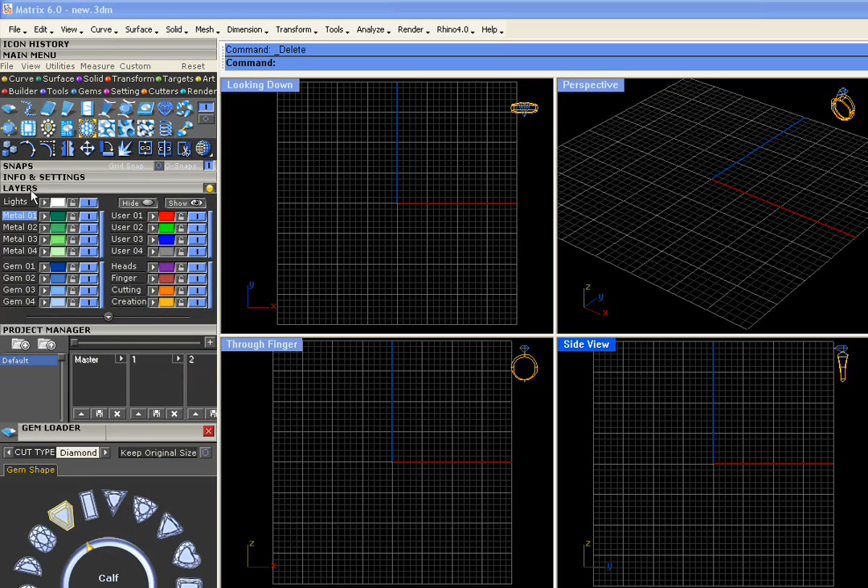The first thing we want to do is go lay out the gems that we need, so we'll go to Gem Loader. We're going to first choose the different stones we're going to use. I'm going to use Princess Cut, and I want to get about a 2-carat stone here, a 6.5 millimeter square Princess Cut.

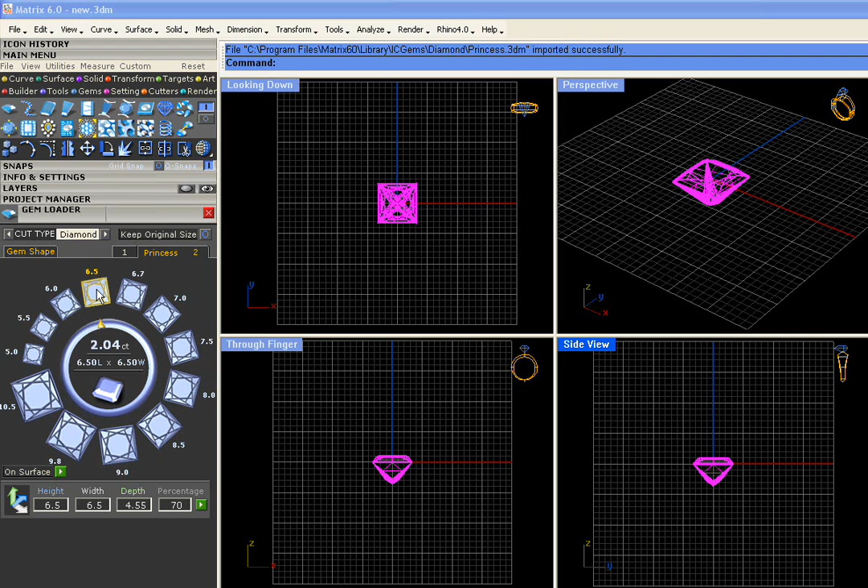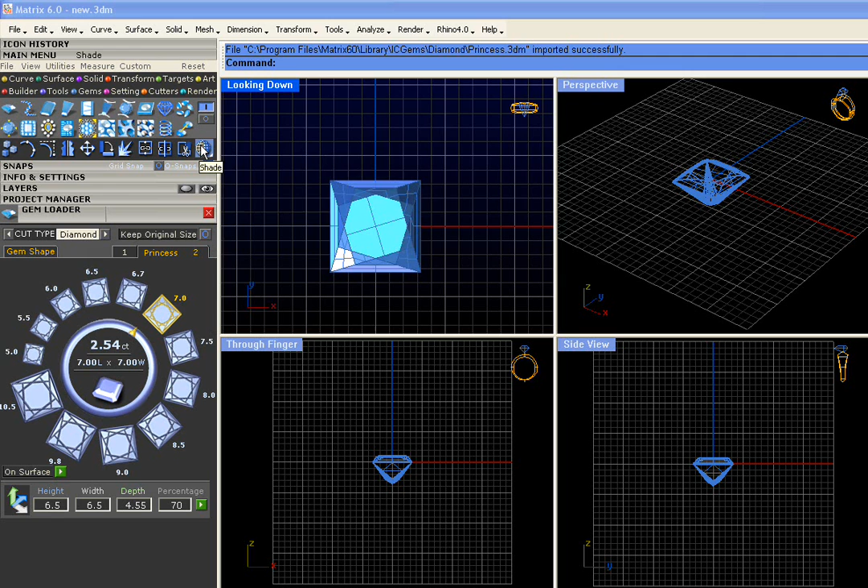There's our stone out there. If we go to the shade globe and click on the little quick tip arrow, we have our different shade modes. You can see as I scroll through, there are lots of different looks. One of my favorites to work in is called the working shade at the very top. I'll click on that one, come back to the shade globe, toggle that off, and then right click to toggle all those on.

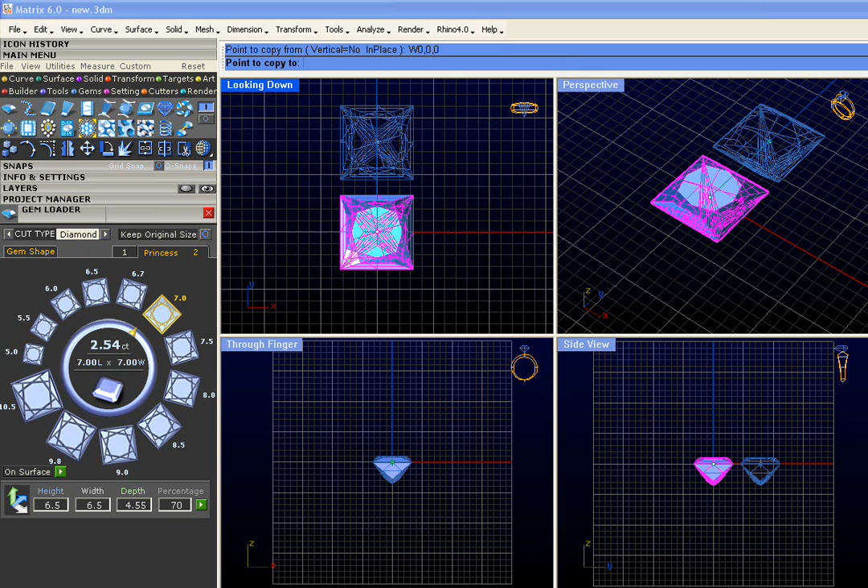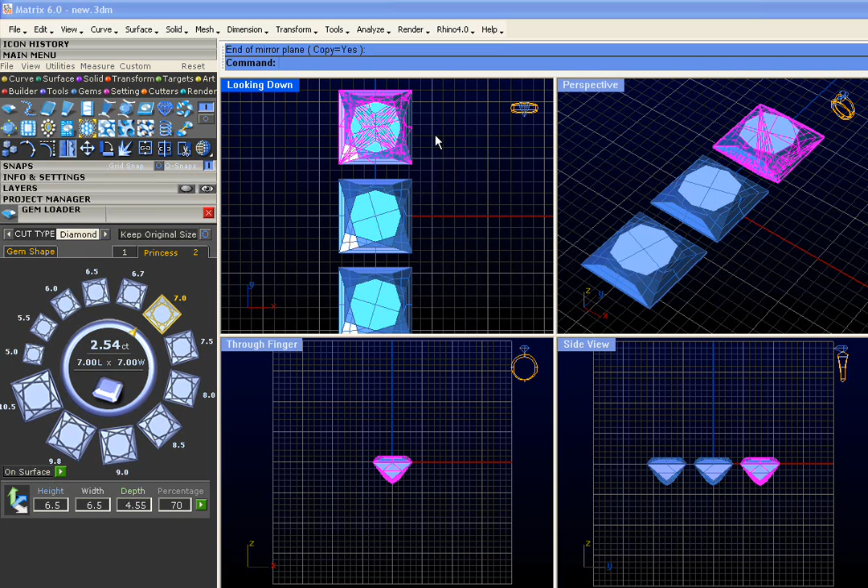So I'm going to go make a bezel for just one of these. Doesn't matter which one, so I'll select it, hit F6, and go to Build Bezel.

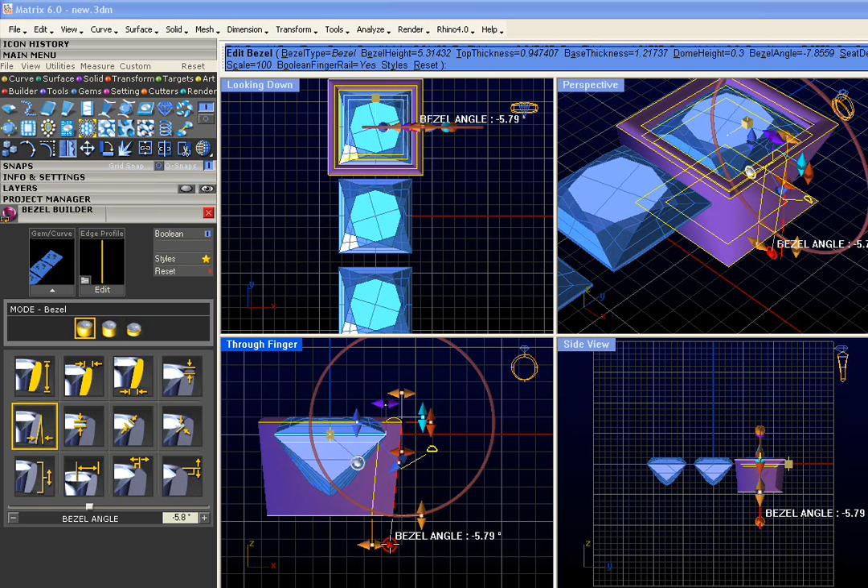It's going to start showing me a preview for this. We've got our different things to choose from. I'm going to take the seat depth down a little bit. And I actually want to take the bezel angle itself and take that out so it's straight walls all the way down, so I can hold down Shift to ratchet that right to 0. So I'll press enter.

I'm going to copy this, but instead of using duplicate to copy the bezel to these other gems, I'm going to select the items that I want to have that bezel on, hit F6, and go to Match Attributes.

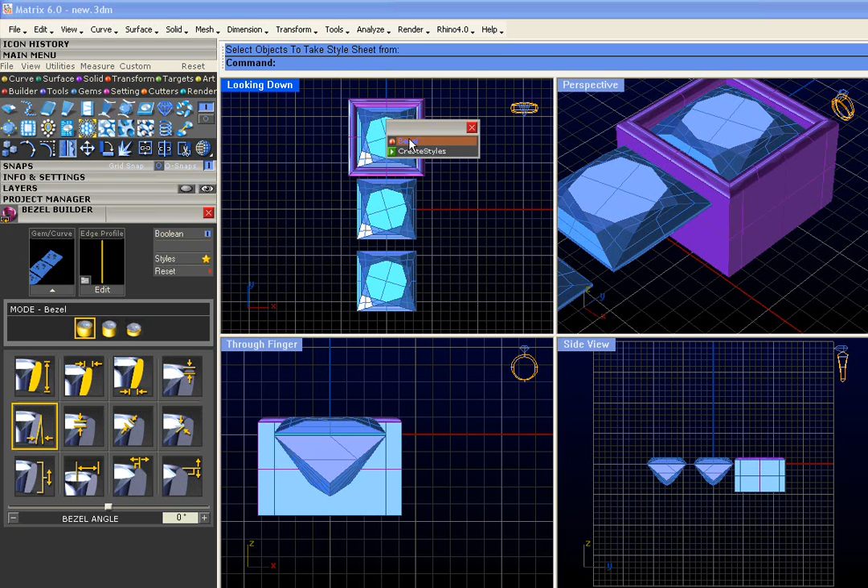It asks me in the command line now, select the objects to take style sheet from. It wants to know what object you're trying to take the information from. That would be this gem with the bezel on it, so I'll click on the gem, and it says, here's the information attached to that gem. It's the bezel and the style sheets associated with that bezel, so we want to click on both. First I'll click on bezel, then create styles, and it's going to copy that information to the other gems that I had selected.

So let's take all that, throw that into a job bag.

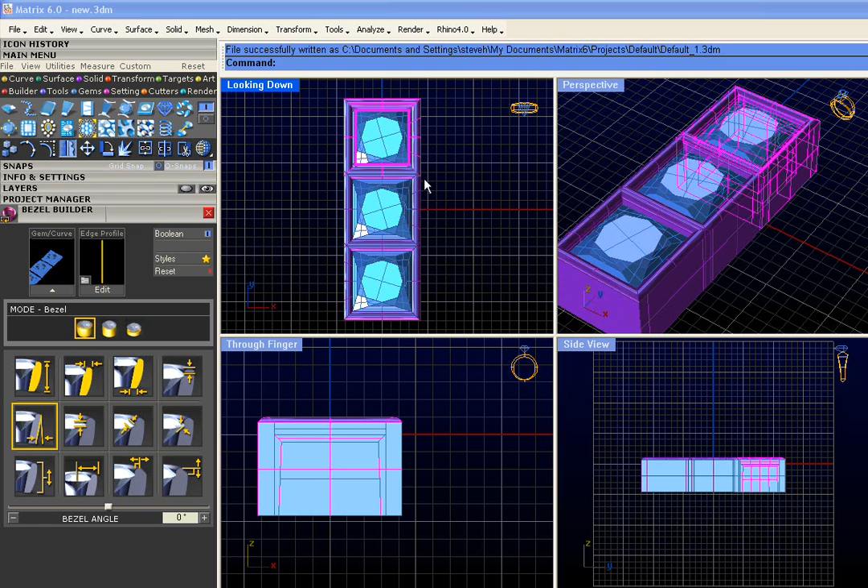Then let's make a variation of this. We'll do a different 3-stone pendant here. First thing I want to do is just delete the bezels off of here, and then I want to swap out the top stone and the bottom stone for a different cut.

So I'm going to select one of those and go back to Gem Loader, and I want to go to Gem Shape and choose a different shape. But before I select anything, I want to turn on the Keep Original Size. If I want the new stone shape to be the same size as this original princess cut, I'll click on this to turn it on.

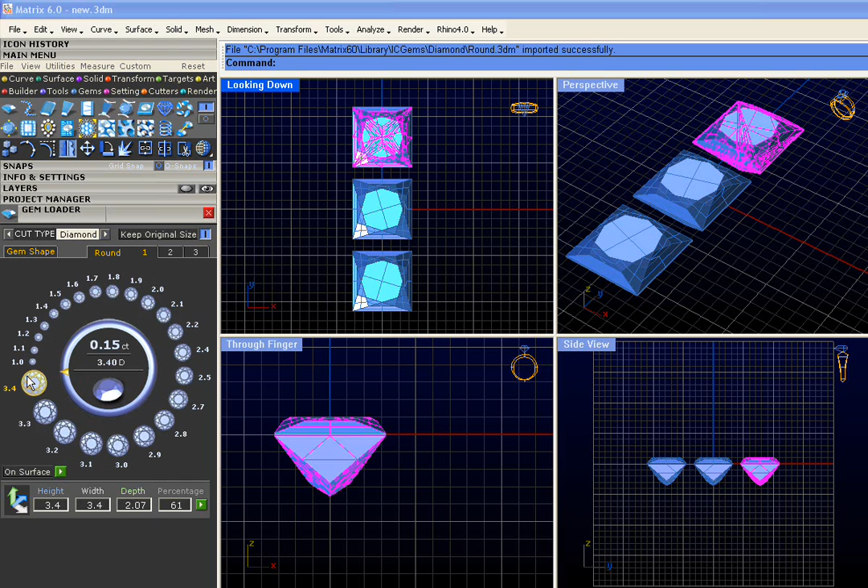Then I'll go choose the shape that I want. Now that I'm in the sizes for that shape, I can click on any of these because I have the Keep Original Size turned on. It's not going to matter which size I choose, it'll swap it out for me.

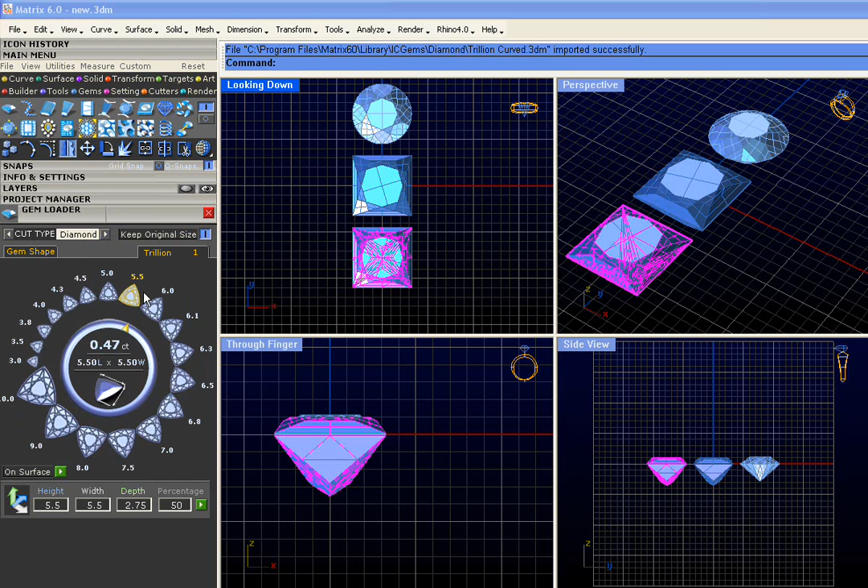I'm going to deselect that. I'm going to select the bottom one, and we'll go over to our gem shape, and I want a trillion for this one. Here again, just select one of the sizes, and it swaps it out for me.

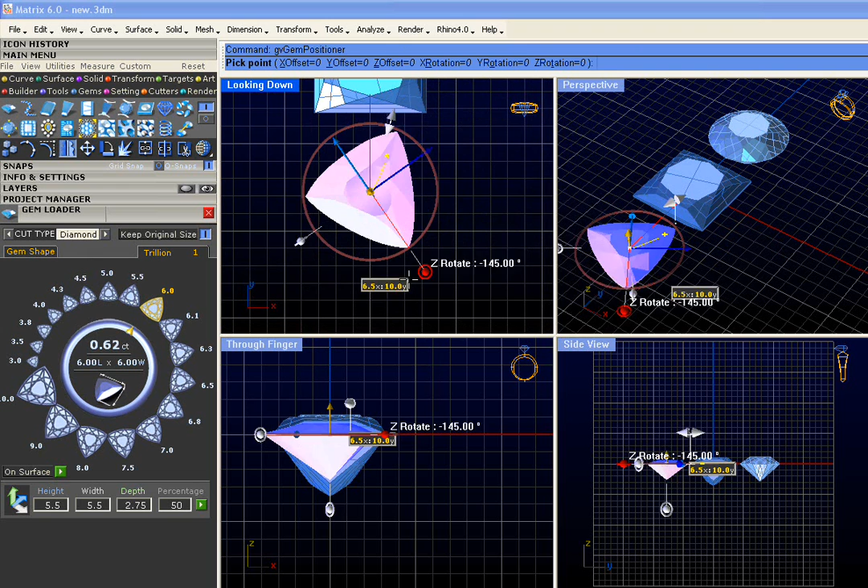Now, this is not the orientation I want for this, so I want to do an F6, MSR, and if I hold down Shift and grab the Z rotate handle, I can ratchet that all the way around to 180 and let go and press Enter, and it's in the correct orientation now.

It's always a good idea to job bag everything as you go. So when you get the stones out there that you want, go ahead, throw those into a job bag.

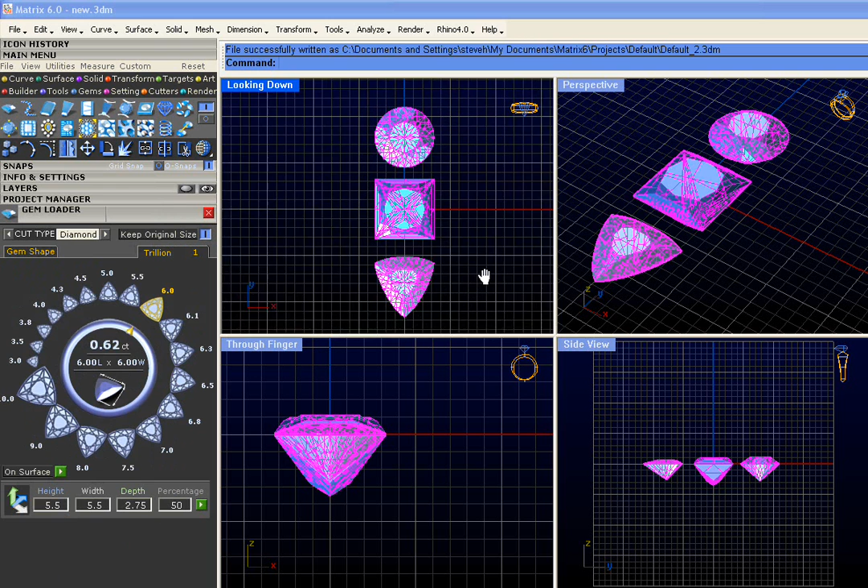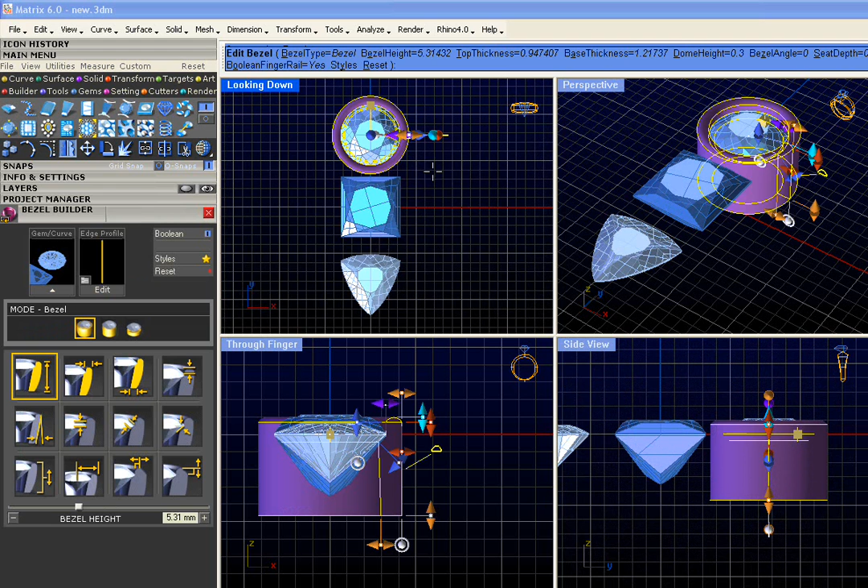So let's create a bezel for one of these stones. There it is. If we wanted to make any changes to this, we certainly could, but I'm just going to accept it as it is. Press Enter, and I want the same bezel to be on these stones.

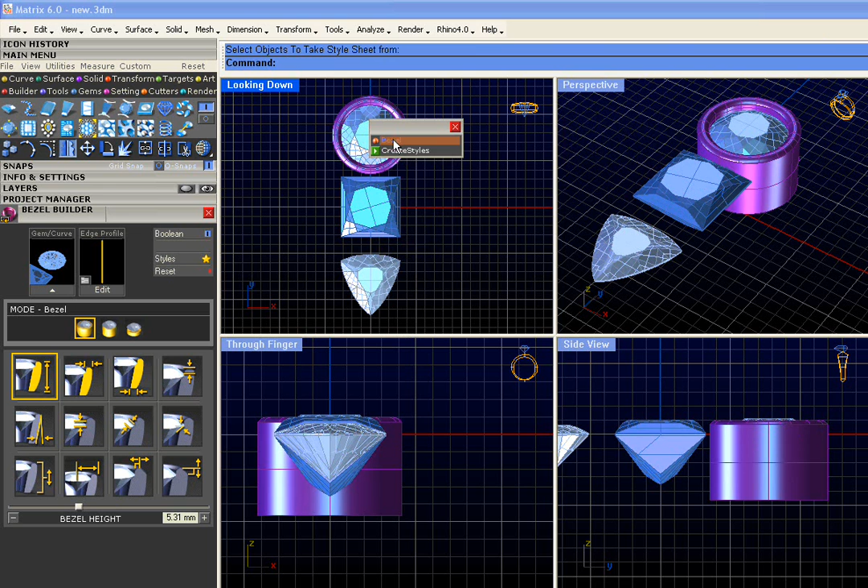So I'm going to select those, hit F6. We want to match attributes. We're going to take the information off of the bezel. We want the bezel and the create styles, and it's going to copy that same information over and apply it to different shaped stones.

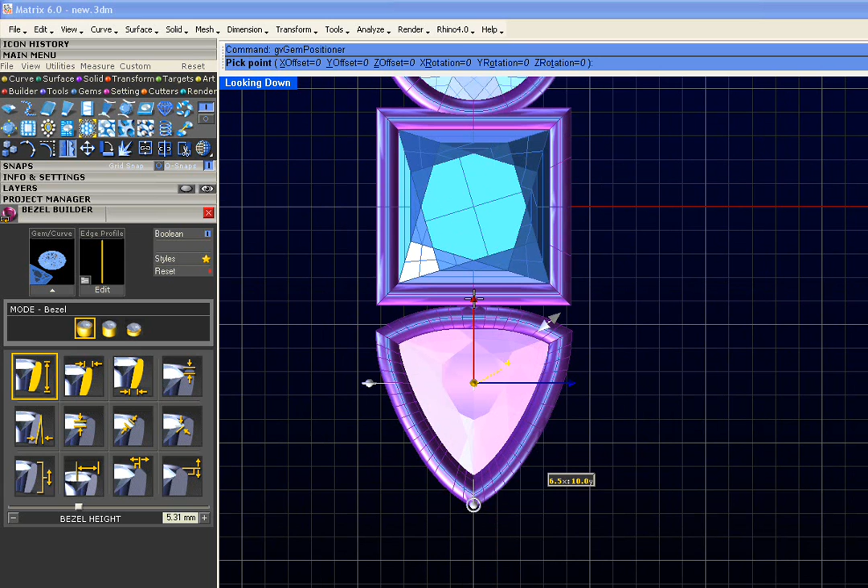Now, if we zoom in here, this one may be interacting - it depends what style or design you're going with here. This one may not be interacting with the metal of this bezel enough, so we could always grab one of those stones, F6 and MSR, and simply move it with the MSR controls. When we press Enter, the bezel has to go with it.

And we'll job bag the completed work.